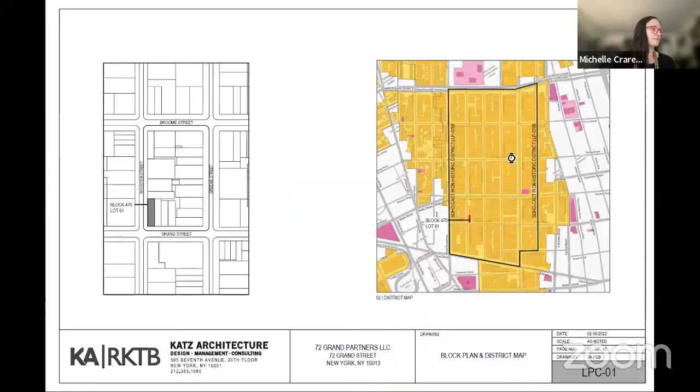Good morning, Commissioners. My name is David Katz, Principal of Katz Architecture, and I'm here to present our building at 72 Grand Street. One thing I want to note: we worked on this building with Carmi B of RKTB Architects. Unfortunately, Carmi could not make it today for medical reasons, so we will do our best without him.

As was noted, we last presented about 8 weeks ago, and prior to that back in 2020. Thank you for having us back again. We've refined the design with the assistance of the LPC staff, and I hope our revisions address all of the concerns that were brought up.

What you're looking at here, on the right-hand side, is the Soho Cast Iron Historic District boundary. On the left, you can see our building site. It's located at the northeast corner of Grand and Wooster Street.

On the left here is a 1940 tax photo of the building as it existed. This was originally a 5-story building designed by George DaCunha. A fire in the 1930s brought it down to 1 story. It's since been demolished and is no longer on the site. Just to the right of that is 74 Grand, which was actually rebuilt using the same cast iron elements that were there—a recreation of a building that was on the site previously.

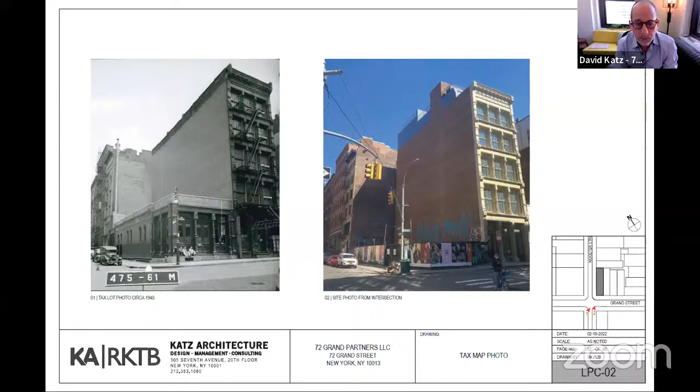This is an aerial view indicating the volume of the building we are proposing. It's a 5-story building with a basement and a setback penthouse that's not visible from the street—5 stories in keeping with the surrounding buildings in the area.

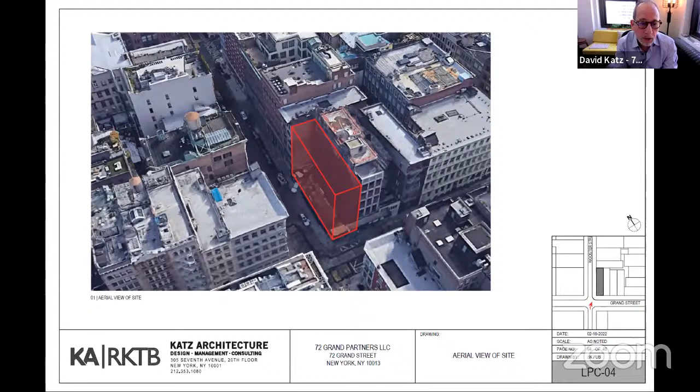Here's the view looking south on Wooster Street. Our building will be over on the left-hand side. You can see the vacant lot there.

This is a view looking west from down Grand Street. The beige building just adjacent to our site is 74 Grand, that I mentioned before.

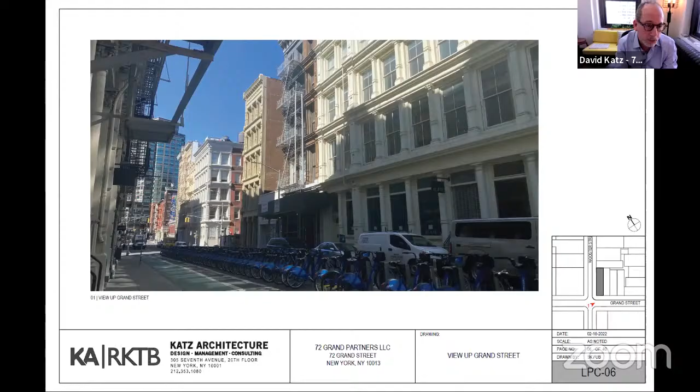And these are some of the neighbors on Wooster Street. As mentioned in our previous presentations, Wooster Street has a variety of building types. This building on the left, 40 Wooster Street, is immediately adjacent to our building. It has kind of a neo or sort of Romanesque vocabulary. A couple doors up, you have another building about 100 feet wide with rounded arches and smaller windows above. Again, in all cases, you see a pronounced cornice and a defined lower level. Just to the left of 42 Wooster, you see a corner building that's just a brick building with punched openings.

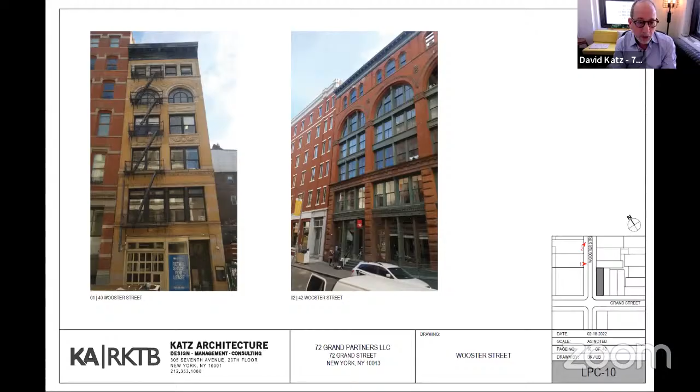Here, this is the building at the intersection of Grand and Wooster. This building was built, I believe, in 1879, and it was built in phases. Again, there's a lot of variation here. You have a sort of Art Nouveau building, a pronounced cornice above the first floor, and a similarly pronounced cornice with a lot of articulation, modillions and brackets.

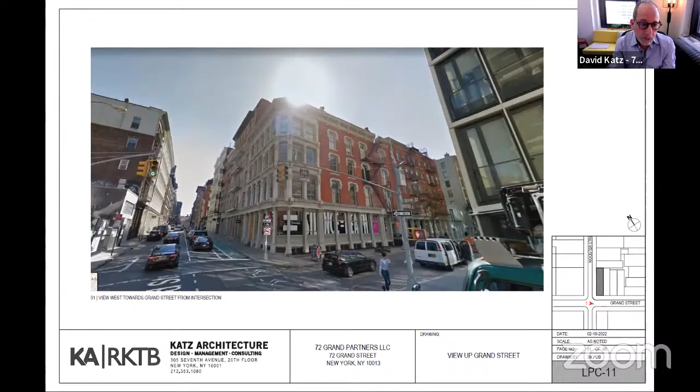As precedent, we looked at a number of buildings, but this one in particular for a few reasons, not the least of which is that it was designed by my colleague Carmi B of RKTB Architects. It's a commercial building located on Broadway and Howard, with a pronounced reinterpreted floating cornice. This is an aluminum composite material similar to what we are proposing.

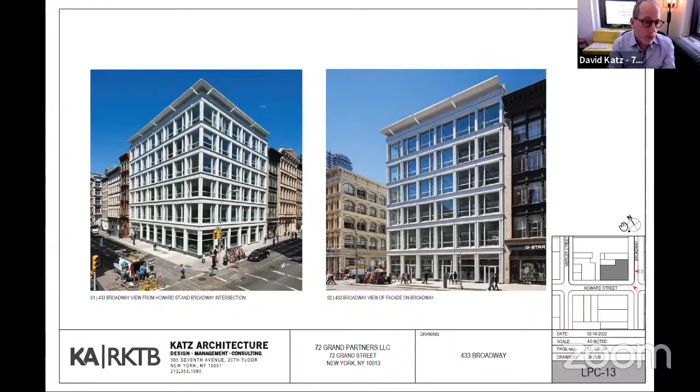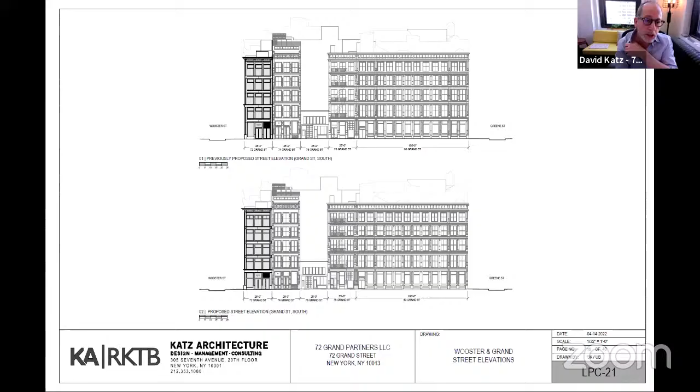This is a view of the Grand Street elevation. There wasn't an enormous amount of change on this. It was generally well accepted. Again, the water table was brought down to just above the first floor. We have introduced some articulation, which I'll get into on the next couple of slides.

The biggest of two other concerns was the change in fenestration at the third and fourth floor. And at the lower level, even though it's not visible here, the building comes down to a granite base. We were showing a black base that we have since changed in color to match more accurately with the aluminum composite material above.

The other thing that we've added here is articulation at all of the verticals. So we've lightened up the columns by bending them back and giving them some articulation. We did the same thing with the mullions between the windows to create that hierarchy.

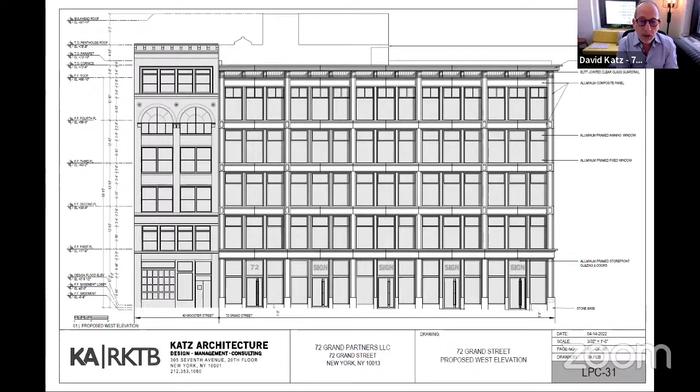The other thing that we did, I neglected to say before, is we've introduced this type of embellishment, or a sort of modern medallion, at the north and south bays of this structure. This does relate back to the original building on the site, which had a cast iron facade on the Grand Street side. It turned the corner, and then there was a brick section in the center, and on the end there was another cast iron section. So we're trying to relate back to that with the use of these medallions.

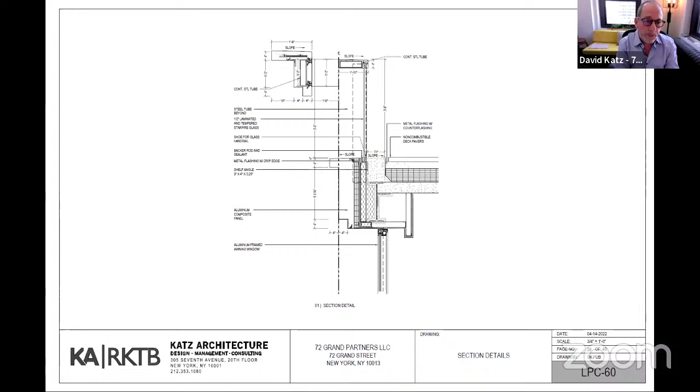This is just a detail drawing showing the way we would construct this. This is a steel frame building. We're wrapping it in an aluminum composite material. The larger elements here are the columns. The smaller ones are the mullions between the windows, which show the various setbacks that we've introduced since the last presentation.

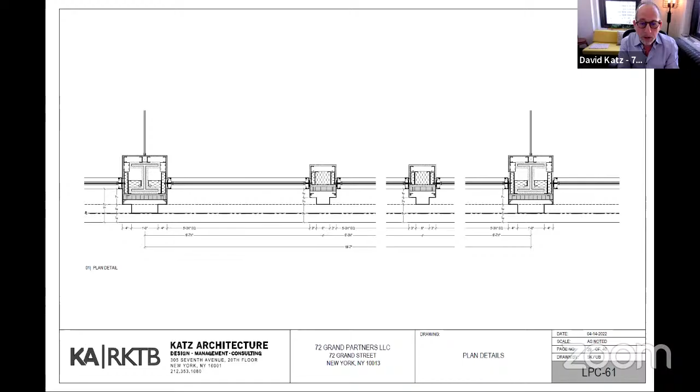And then this is a diagram just to show the level of detail that we've introduced to create this sort of crenellated, or this variation, I should say, in terms of the vertical elements to give them more shadow and detail and articulation.

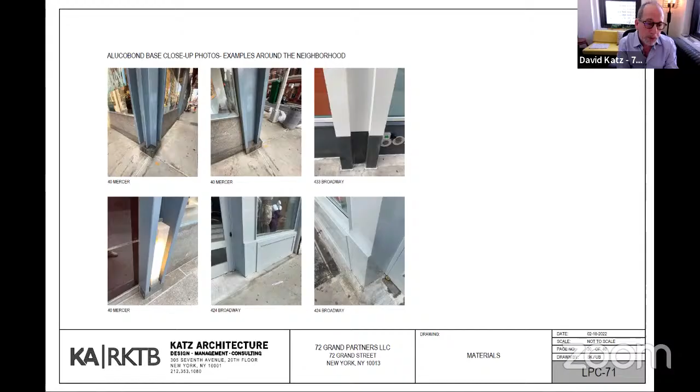In the district, there are a variety of examples of the same material. We looked at these buildings for the amount of detail they used and how they articulated the metal panel. At 40 Mercer, you can see how it turns the corner with a recess in that column. Something similar at 433 Broadway. And at 424 Broadway, you have a framed recess to give it a bit of articulation on the facade.

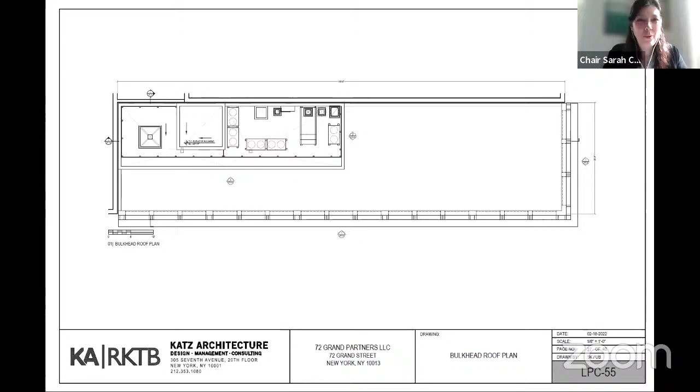Thank you. My question is simple: from the property line, which I gather is where your columns are placed right on the property line, what is the dimension back to the glass line?

How many inches? I have to check, I believe it's about 12 inches, if I'm not mistaken. Okay, thank you. Any other questions?

At the time, there were comments about the fenestration pattern and typology, whether it was looking toward the variety you see in masonry buildings or the regularity in cast iron buildings. I think the applicant has presented today that they're modeling their design on the cast iron typology, which has a fairly regular fenestration pattern they've tried to incorporate here, along with addressing questions about the material from last time as well.

The applicant has presented more information on the level of new details added and how it expresses itself elsewhere in the district. So we'll begin our discussion with that.

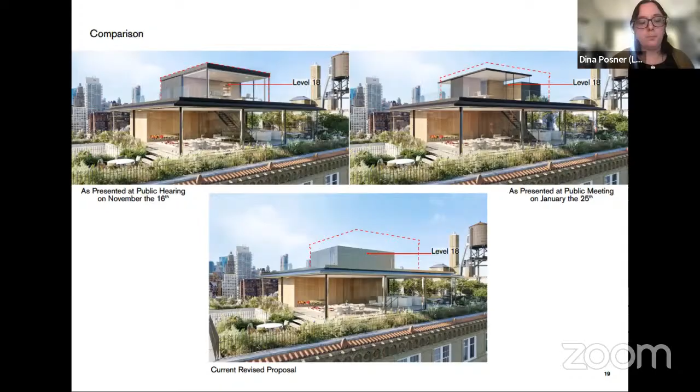Chair Sarah Carroll, commissioners, thank you for the opportunity to represent our proposal. In effect, we've moved from 2 stories of accommodation down to a single story, and the height overall is the same as it is now.

In other words, we've lowered it by 3 feet so that we line up with the elevator overruns. Like the present arrangement, it cannot be seen from the street.

From the longer views from the park, for example, it will now recede more by virtue of the color. So we've revised that from the quite contrasting black of the original proposal to something which is a mid-gray and relates much more to the sky views.

I think that's really the essence of the redesign. In summary, to go from 2 stories of accommodation to a single story and to reduce down to the present height of the overruns.

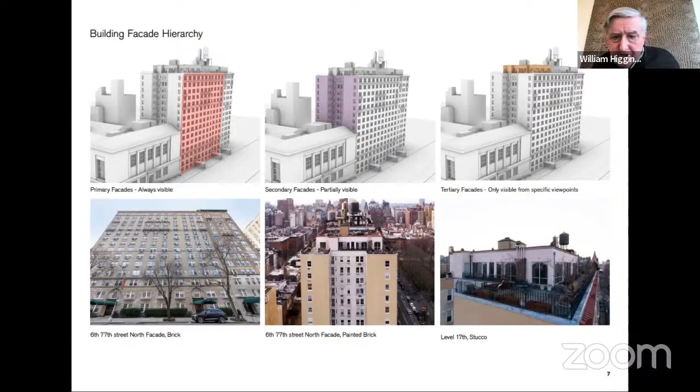The existing and proposed condition is very typical of what you see on the west side, where you get these juxtapositions of taller and shorter buildings and primary facades, and then lots of secondary side and rear elevations, and on top of those, the utilitarian volume. So the existing and proposed conditions certainly fit into that typical situation.

These are a number of typical examples of one-story-plus functional utilitarian enclosures above, additions that have been approved and found appropriate by the commission on the Upper West Side. One thing we think is important is that there are a number of languages the commission has found appropriate, from pretty historical in character to some more abstracted ones, particularly this one in the center, where there really is quite a modern language used. So the commissioners have found a variety of languages to be appropriate.

As Lord Foster has articulated in the past, the philosophy here is that in the evolution of historic buildings and historic places, a contemporary modernist language is a very appropriate way to express the ongoing growth and evolution. This, we think, fits precisely into that approach.

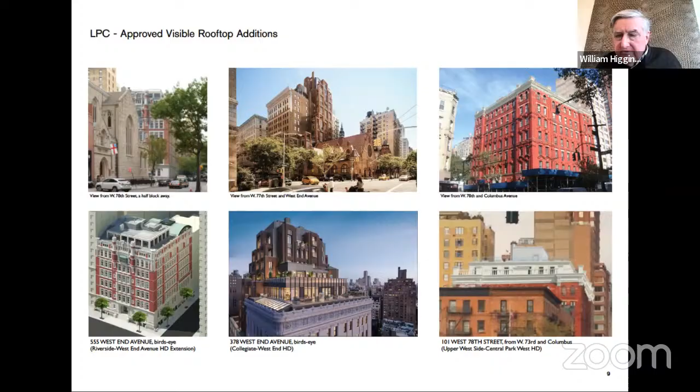The immediate context - I always think it's important to remember that directly across the street is the Museum of Natural History, and I don't know that we have any better example in New York City of how a historic place can evolve, including quite contemporary and carefully, thoughtfully designed new portions of construction. Although in a much smaller and more modest way, we feel that what we're proposing today fits into that.

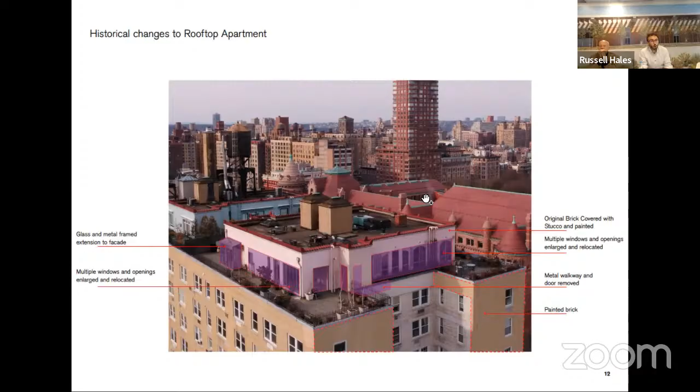Looking at the side elevation, it sits adjacent to another penthouse box, but you can see the elevator overruns which are existing. These do not open to level 18; they are the overruns from level 17 below. We think it's very important that proportions match for level 17, as we've explained before.

Looking from above, again a view you don't normally see, you have the elevator overruns at the top, but also a collection of MEP and chimneys added over its life and history. Our proposal is to consolidate those utilitarian elements and bring them together in an enclosure that matches the elevator overruns, also bringing up a new fire stair to this new roof level, which doesn't exist today and is currently accessed via ladders. This improves the life safety of the building.

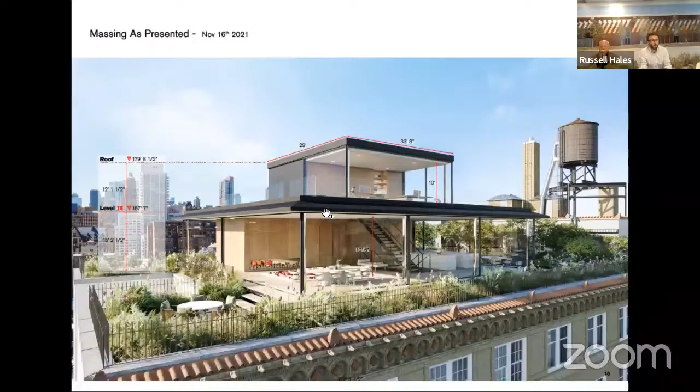So really this constitutes the majority of what the new enclosure will contain. As explained, this is where we were previously, with the glass enclosure upstairs at level 18. But level 17 is consistent through the designs - an open plan pavilion residential property surrounded by a garden. Coming back in January, we looked at modifying the heights and minimizing it, bringing it down around 19 inches and separating the MEP out to reduce its overall mass and visibility. But it was felt this still had a presence on the street.

So really looking at minimizing level 18, turning it into a utilitarian enclosure. This is 53% volumetrically smaller than our original proposal, and really just matching the elevator overruns. This starts to make it invisible from the streetscape on all sides - obviously visible from the park itself, but not from any of the streets that surround the project.

A summary here of the volumetric moves we've made throughout the life of the project, really thinking carefully about maintaining the clarity of the lower pavilion, which is really a replacement and not having an addition now.

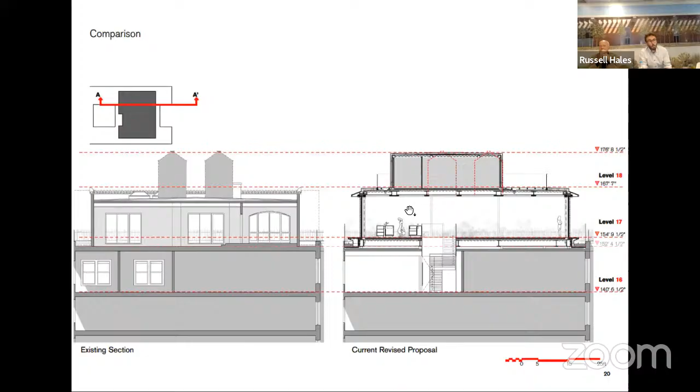Just seeing the cross section side by side, you can see how we're lining up with the elevator overruns shown in red here, and also running through the datums of the existing roof parapets and the tiles. Then the evolution showing where we were in November and how we've tried to bring that height down. But really, this is just the MEP enclosure on that upper roof.

From a footprint point of view, looking down on it, about 50% of it is MEP. We have the dark boxes here, which are the elevator overruns, which will be retained. To reduce visibility, we've ensured that we are tight on the eastern side up against those elevator overruns. Where we were historically, the pink dotted line here, we brought that back both on the north and south to ensure we don't have visibility from the streetscape below. You can also see the new stair tower coming up and some additional storage we're adding in.

So really just thinking now about the coloration, a zoom in of that level 18 and where we were with the glass enclosure at the top, which posed issues of materiality and illumination. As we looked at stepping it down, we then had the other conversation about coloration and really looking at the best way to make a receding volume up against that skyline.

As you saw from the photograph Bill shared earlier, we are looking back at this from the park. So we're trying to blend it into that rooftop utilitarian architecture collection that runs through on 77th Street - the water towers, the galvanized metalwork, the lead, the zinc - bringing that color through as a matte finish into our metalwork enclosure, but also the perimeter edging around our parapet, so that it lessens the contrast with the roofscape.

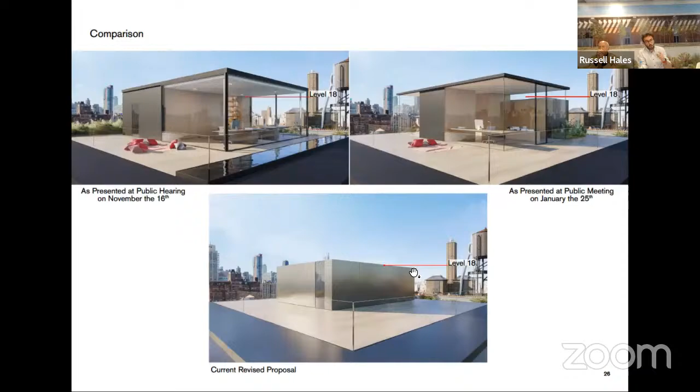And then seeing a summary of the moves that we've made from where we were to where we are today.

Obviously, we have a very simple material palette running through the project by the nature of it being the pavilion. The upper level here was the materials we chose, and we were looking at blackened stainless steel, but we're now proposing a more zinc colored, matte finished metalwork. And obviously glass is still the dominant material.

Learning from our experience on many projects, we're getting low iron glass so it doesn't have any tinting, having low reflectivity, the same type of glass we'd use in retail projects to really reduce glare and the way the light hits it. But again, thinking about warming up that ceiling color, we did look at darker colors, but that created more contrast against the sky. So a paler ceiling, but a warm pale ceiling, seemed to fit best.

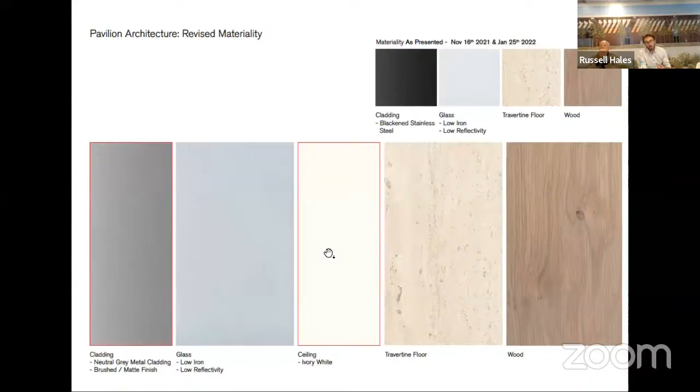This is just showing a cross section through the structure, and as we said before, we have a new steel cradle that sits across the project. This ensures we can spread the loads of the new pavilion evenly across the historical columns that run through the project, ensuring we have a new insulated, safe roof on top. And then the majority of materials are the glass, which have minimal frames.

And then we have a series of internal and external blinds providing privacy, light control, and actually help us with bird impacts. So this is a view looking back from the park, seeing the illumination.

In our earlier conversations, illumination was a key concern of the project. We're working with Suzan Tillotson on the lighting here, based in New York, removing any external lighting on the project. With our transparency, you can see right in. So it's really about not uplighting that ceiling and not washing our central core walls, to make it blend into the background and not illuminate the upper story. That really starts getting the silhouettes you see of the water towers beyond.

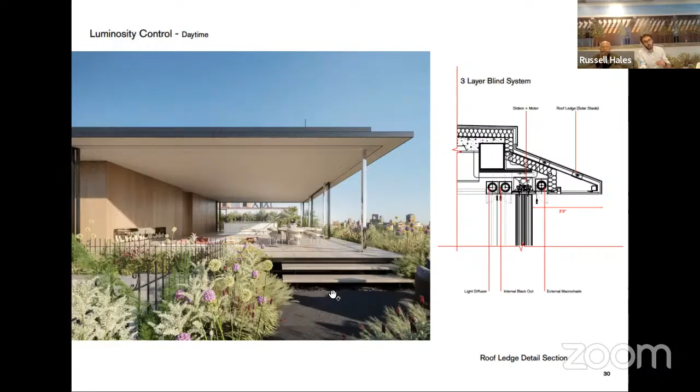And then a zoom in of how the fenestration works. Again, really looking at minimal detailing within here, the operable glass windows that can slide back. But then by night, when those are closed, how do we reduce the glare?

We have a series of internal blackout shades. From our experience, a darker color actually works very well behind glass and is less visible from the streetscape. But we also have an external macro shade, which will be deployed when solar gains are very high.

This actually works very well with bird impact as well, and we're working with Andrew Farnsworth from Cornell Lab of Ornithology to look at the best way of doing that. This is an intelligent system where we can deploy the external blinds at points of high migration for birds, really thinking about bird impacts and trying to mitigate that. That also comes into the landscaping, ensuring we have low landscaping that doesn't encourage roosting for birds.

So I think the key message for all of this is really the views. This is the current condition. As we said before, from 77th Street, immediately adjacent in front of the building, you cannot see the existing penthouse box as it stands. It's only when you move all the way across Central Park West that the existing pink stucco penthouse becomes visible.

Now, over the duration of the project, when we showed you before, level 18 was partially visible at the top. We then tried to reduce that with our scheme that came back. But really, where we are today, the fact we're matching those elevator overruns in height and setback means we no longer have visibility to level 18 from the streetscape around. So comparing top left here with the existing, and bottom right showing that only the level 17 datum runs through, and that level 18 now becomes invisible.

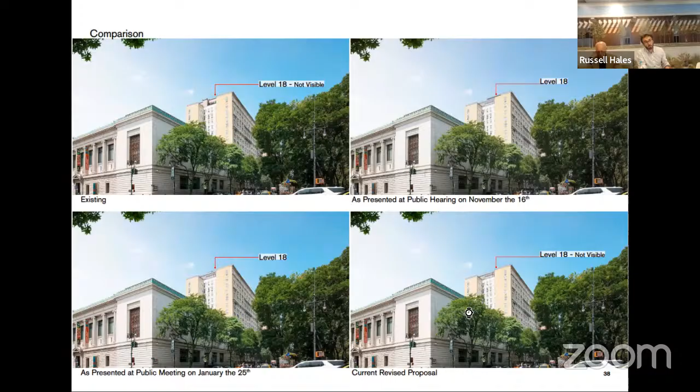That then continues around all the streetscapes. From 76th Street, you have the open lot view looking up. We know this lot will be infilled later in its life, but currently, when we had our January scheme, there was an element of visibility. Where we are today, there's no visibility on the right-hand side.

Again, moving down Central Park West, visibility was seen in our previous attempts, and again no visibility on the right-hand side here for level 18. That really is tracked through even in the views where we don't have leaves on the trees, probably the most visible view, looking through here in the winter conditions. And obviously we had a presence where we had the taller addition on level 18.

But as we move forward to where we are today, the enclosure at the top is not visible at all. Just showing the comparison from where we were in January to where we are today, I think we acknowledge there will be some visibility of the enclosure top. As you can see in this photograph, just above the pink stucco is the elevator overruns, which is just popping up, and that's visible from within the park itself.

Where we were back in November, which had a high level of visibility and elements of concern. But as we move to the January scheme, trying to reduce and balance it, still had visibility. So where we are today, you're just catching a glimpse of the utilitarian MEP enclosure that sits there, matching the same height as the existing elevator overruns to minimize its impact. Finally, just showing from top left to bottom right where we are, matching those kinds of enclosures at the top.

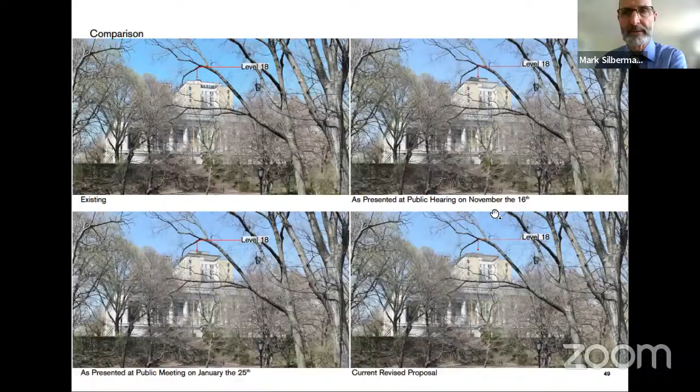With 8 in favor and 1 opposed, the motion passes. That's approved. Thank you, and that concludes our public meeting part of our agenda.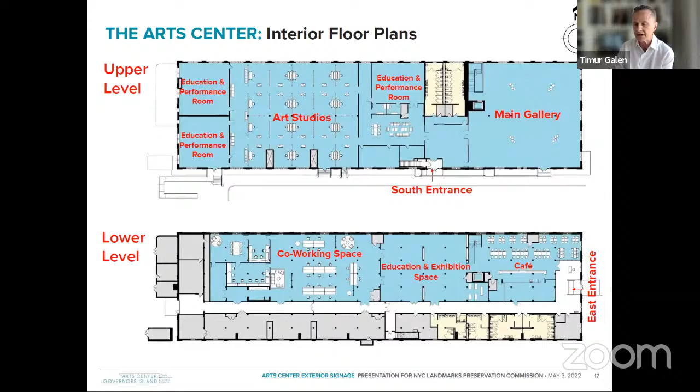The celebration of creative diversity presented live in public spaces throughout Lower Manhattan. In 3 short years, the Arts Center has become integral to how we serve, connect, and make space for artists in the community, a place for artists and their audiences to engage in the most challenging issues of our time. Working with the Trust, our exhibitions, performances, and other public programs are designed to explore island-wide initiatives, including climate change and environmental sustainability.

All of our programs for families and adults alike are free and open to everyone. We also give public access to artists and their creative process through workshops, open studios, and a range of other educational programs. Finally, our year-round residency program allows artists of all disciplines to research and incubate new work, engage with audiences on an experimental basis, and build the professional skills and networks essential to successful contemporary practice.

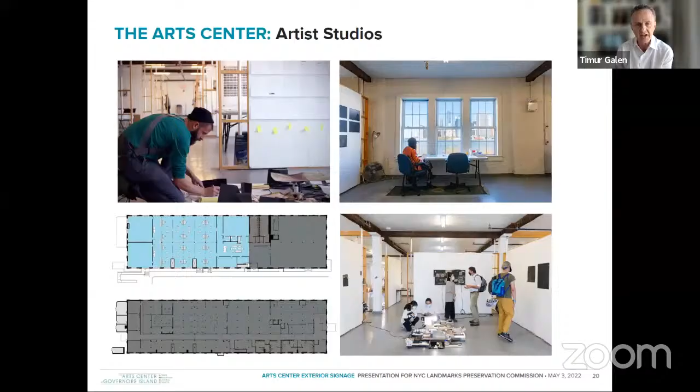The cafe, located at the northeast corner of the ground floor, is linked by an open architectural stair to the main gallery on the second floor above. Using the plan at the bottom of the slide, it's the area located on the upper right, immediately adjacent to the main entrance. The cafe, the adjacent exhibition and education spaces, and the main gallery above constitute the principal public-facing elements of the Arts Center.

With line of sight to the ferry landing, the cafe is designed to be open throughout the day and into the evening, a place for a coffee and brioche, casual lunch and evening meal, and most importantly, a place to experience the art of performance, be it musical, theatrical, the spoken word, dance, or other multidisciplinary works of art. Last summer, the cafe presented a series of concerts in partnership with Jazz at Lincoln Center. With ferry service now available year-round and increasingly into the evening, the opportunity to bring performance artists and their audiences together is truly boundless.

I can't tell you how delighted we at LMCC have been to work with Ann Harakawa and her 212 team, given how successful they have been in using public information design to shape the civic and commercial landscape of New York over the past 2 decades.

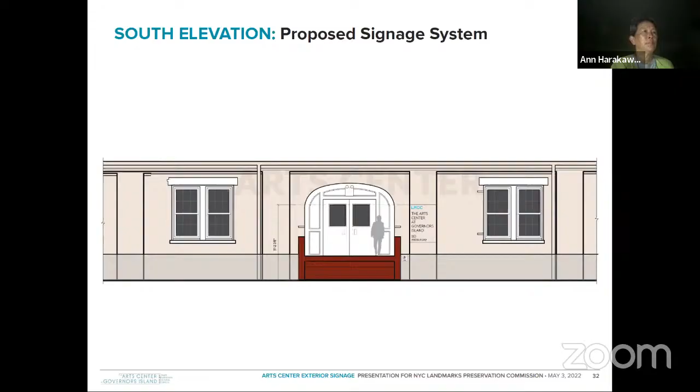So the tinted stucco letters are large scale letter forms that are stencil painted with a natural mineral silicate paint. The product we've specified is manufactured specifically for historic stucco facades with an appropriate range of subtle colors, and is frequently part of restorations that are guided by the U.S. Secretary of Interior's guidelines for historic restoration.

And then the building ID and address plaque is mounted onto a painted panel, colored to match the facade, with dimensional letters. The plaque will reduce the number of penetrations into the building facade for mounting, and the dimensional and mounting details are included in this drawing. You can see on the right, there's a section showing the number of penetrations.

And then ADA accessible code required signs are also needed at this entrance. Again, we've used a painted panel to reduce the number of penetrations.

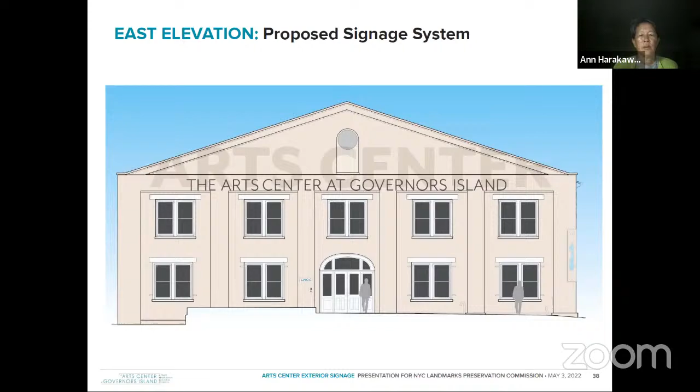So again, going through the details, this is the same stucco that was specified on the other side of the building here on this side.

These are the building ID channel letters, the scale of the letters, the thickness, and how they're meant to be mounted. They're actually mounted on a raceway, again, to minimize the penetration into the building surface.

Continuing on the door entrance signs, again, here we use the painted panels with pin mounted letter forms to reduce the penetrations. So you can see we've designed a kind of system for consistency at the entrances, as well as simplifying the methods.

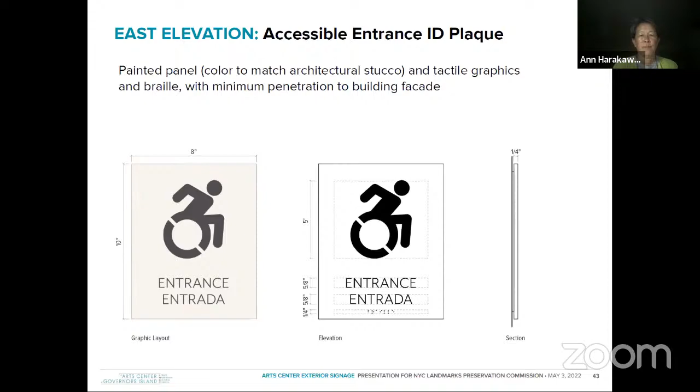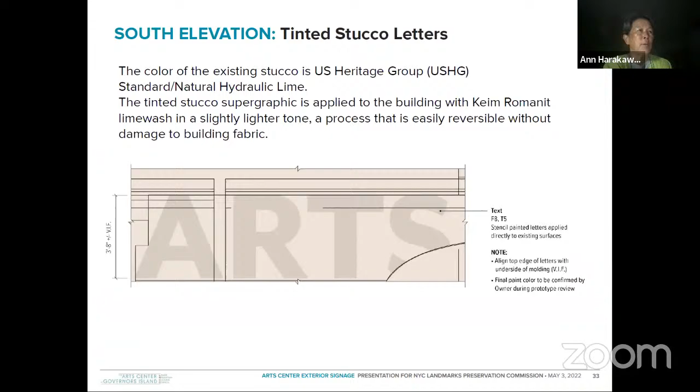Are you talking about the sign panels at the right side of the door? Yeah, why not put one on the left-hand side, just to keep the symmetry? Yeah, I think that in this particular case, we didn't necessarily feel that we needed both of those signs. We felt that we only needed one.

And we were thinking about the surface of the building as well. That's true, but in terms of the architecture, you just need one functionally. But perhaps two would work with symmetry, but perhaps not. Just a question, just a thought. Thank you. Okay, other questions?

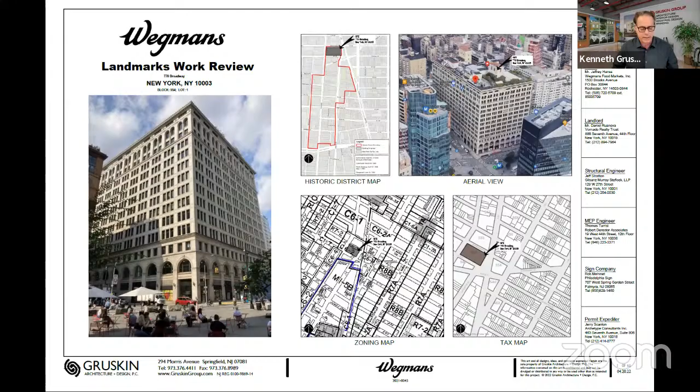Let me start with the ground floor, because it sets the story for Wegmans. They're taking about 92,000 square feet of space on grade level as well as the lower level. They're taking approximately 10% more space than Kmart had there previously, and anticipating serving a market area about a mile and a half in the Manhattan area.

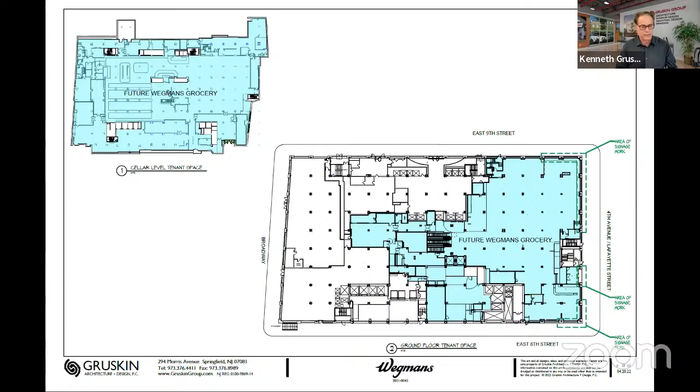When we get to the infrastructure of the cooling tower and generator, size is certainly part of it. Being 92,000 square feet will make them, if not the largest, among the largest supermarket grocery stores in the city. The closest one is Whole Foods up at Bowery and Houston, which is about 70,000 square feet.

So we're going to start with talking about the signage. But before I get there, I want to say that for the wall signs, we've worked with staff and appreciate all their input. We've worked to meet the staff level review criteria. The only reason it's here today is because of their larger size, because of the larger building and the larger tenant space that Wegmans is taking.

Wegmans has tried to be sensitive and acknowledge the historical nature of this building. In fact, they've altered their standard sign package. If you've been to a Wegmans elsewhere, it's usually a red channel letter. Here, they're going to a halo-lit sign, which we know Landmarks prefers. The letters are in a gold anodized finish, which is more historic and fitting with the building. The green matches the previously approved colors of the window mullion systems. It's all meant to fit into this environment. These areas show where the signage is being proposed.

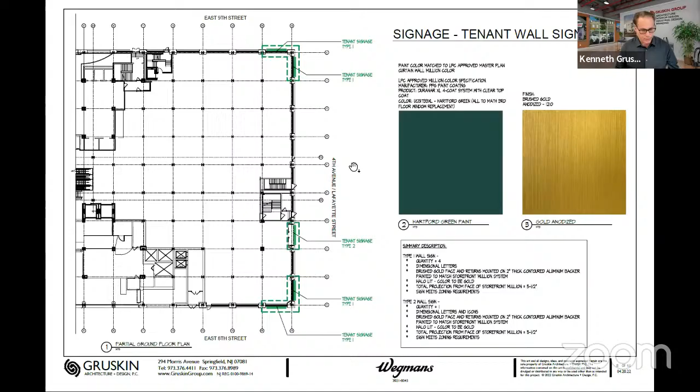Looking at these elevations, there are two types of signs on the building. There's the type 1, which are on the corners, and the type 2, which they call the fork, plate, and goblet, which is over the entrance.

In terms of lighting, the signs are typically lit 1 hour before and after store hours, and the store hours are anticipated to be approximately 7am to 11pm. All the signage we're showing you today complies with all zoning related requirements, well under that, and is subject to LPC approval.

This is a type 1 sign, designed to scale and fit into this clerestory area. The green is the backer, using a halo light, with brushed gold letters. This next detail shows the sectional detail of how it applies. It's supported by the mullions, and all the mounting attachments and wires are concealed, so it's a very clean installation designed to scale and fit into that space.

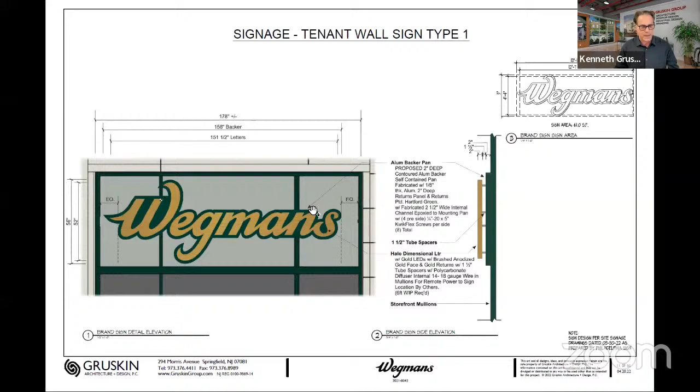This is the type 2 sign, the fork, plate, and goblet. Same as the other in terms of lighting and finishes. This is sized to fit into this center zone and mark the entranceway.

In this next sign detail, you'll see it has all hidden supports and attachments and wiring, except there's one attachment bar that comes across in the same green finish. That needed to be there because the wind loads wouldn't allow it to be supported just on the mullion at the bottom.

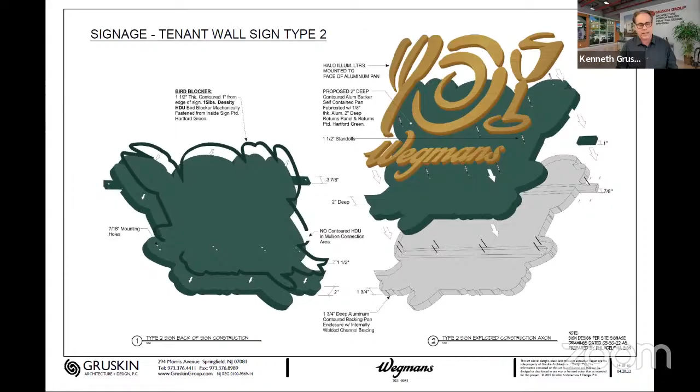This is a view of the backside, shown to demonstrate that the Wegmans team has put thought into maintaining the integrity of the sign and also preventing bugs, bees, and birds from nesting in the back or between the back of it and the glass, with a bird blocker and such, trying to keep the sign clean and keep debris off the building.

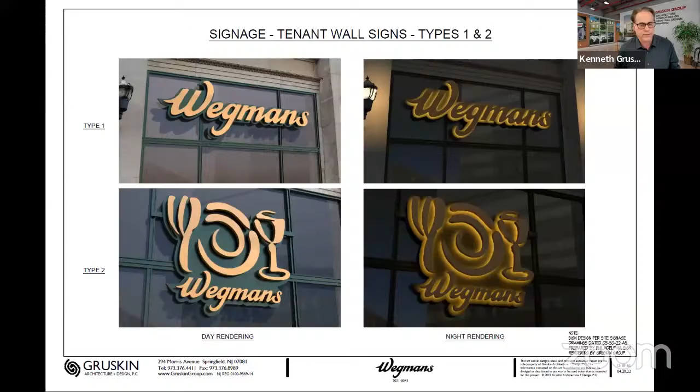This is a rendering of the type 1 and type 2 signs in day and nighttime. The illumination is going to be a soft gold glow that will match the articulation of this lettering that we see in the day.

So now we're going to talk about the promotional signage being proposed in the windows. Just to point out, those are really just in this corner. If you look at the plan, this is where checkout is—you have self-checkout registers and some manned checkout registers along the windows. The signage we're proposing has numerous functions, including visual security, which we'll talk more about as we move along.

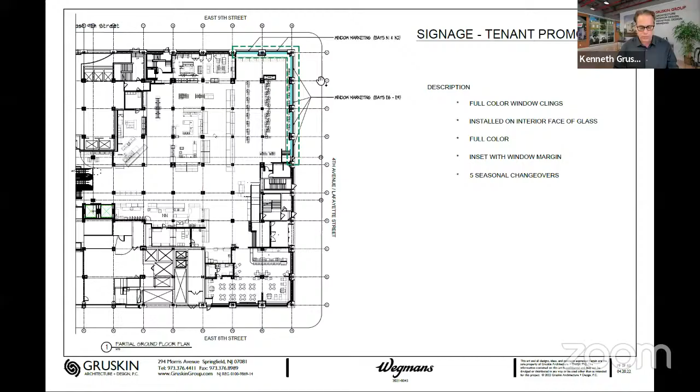So this is an elevation that shows where these promotional graphics are going. Again, just from a zoning perspective, not LPC, what's being proposed for Wegmans is less than, about 45% of what technically might be allowed, even when you include this.

Also, all the window graphics have a 6-inch space around them. So visually, as you walk by, you can see activity inside, yet they also provide some visual security to people on the inside at the registers and whatnot. Now, a key point about these graphics: they are perforated and they cling to the inside of the window. So you see the plane of glass, and from the outside you wouldn't necessarily know if it's not a solid opaque panel.

They are full color, and unlike most graphics you'd see at supermarkets that change weekly with specials like buy a loaf of bread for X, these are more storytelling and change 5 times a year. You can see the schedule. So they're really about communicating values, storytelling, and a little about how they do business.

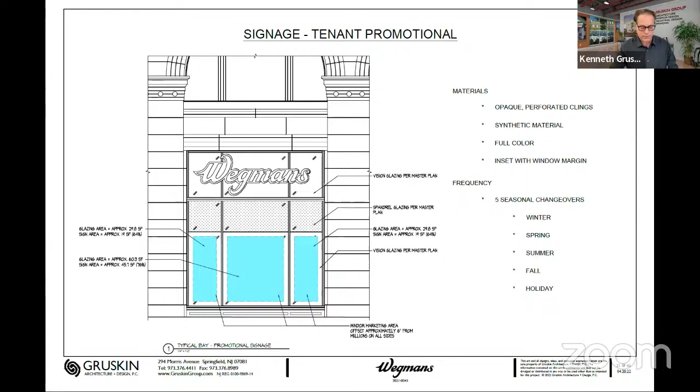Previously Kmart came before you a while back when they made changes to their signage, and what was approved was that only 3 windows were open—everything else was either opaque or completely covered with their displays and graphics. Certainly what Wegmans is proposing is significantly less than this, in that we're opening a lot more windows.

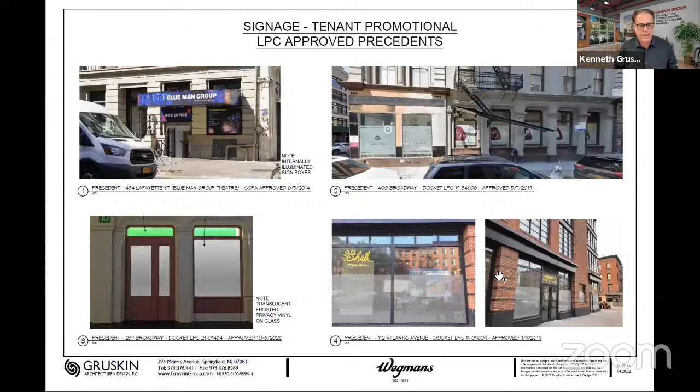So with that said, I'm going to move on to the infrastructure up on the roof that's being added, the standby generator and the cooling tower. The big thing I want to get across from the start is there was almost no real estate left up here to work with.

The team looked at every possible option to make sure that whatever could be seen from street level would be minimized. We can tell you that the standby generator in this corner—the only other corner available was where the cooling tower is. It wouldn't fit here, so even if we wanted to put it there for some reason, it wouldn't have fit.

When it came to the cooling tower itself, which we'll talk about in a minute, we looked very carefully at whether it could be rotated, could it be smaller, could it be pushed. It's really optimized where it is now, and we'll go through that.

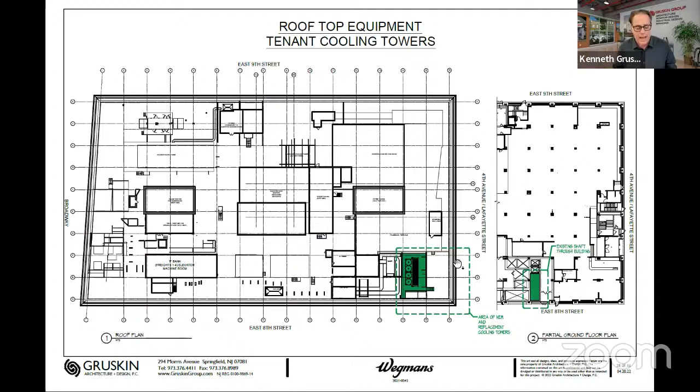Also, could it be rotated? The only way onto the roof, you have to actually go through the Facebook terrace, and there's a little series of steps here. If it was rotated, it wouldn't have been possible to get to the roof. And the other part is, we believe that as you come down Lafayette from Prince, it would have been much more visible, which you'll see when we get to the renderings. Certainly it would have been on top of the Lafayette along Astor Place.

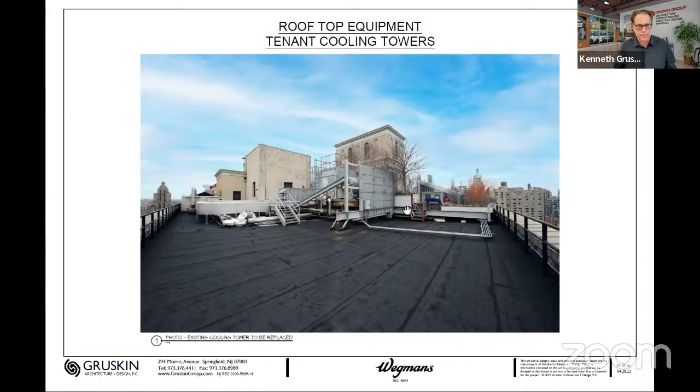This is a photo of it up here. You can see a screen wall that is for acoustic and some visual privacy for the Facebook crew up here. This is the access ladder to the roof.

Additionally, we even explored whether the dunnage could be reduced, lowered to the roof to reduce height even a little bit. It's really optimized because you have to maintain clearance for roof maintenance, plus you have to have enough size to the dunnage so that it reduces vibration traveling into the building and also maintains safe connections and construction integrity over time.

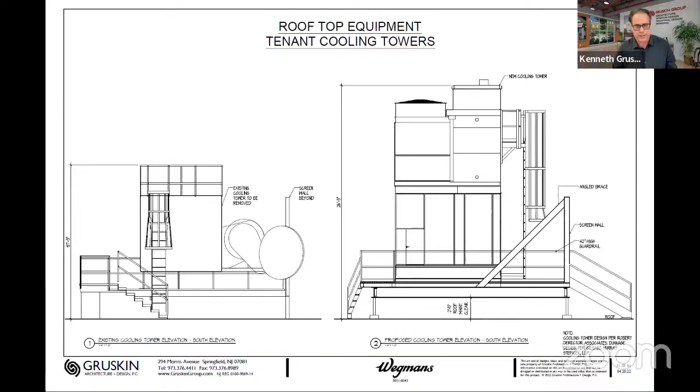Mr. Gruskin, we are significantly behind schedule. So if you wouldn't mind focusing on the highlights with the visibility, we can come back to any technical things with questions later. Okay, well, I think I went too far, hold on.

All right, so I'll just jump to the renderings and the photos. Basically, this is the mock-up on the roof here, pretty self-explanatory. When you get to Astor Place, that corner by Cooper Union, basically it's still invisible, so you don't even see the cooling tower in this location.

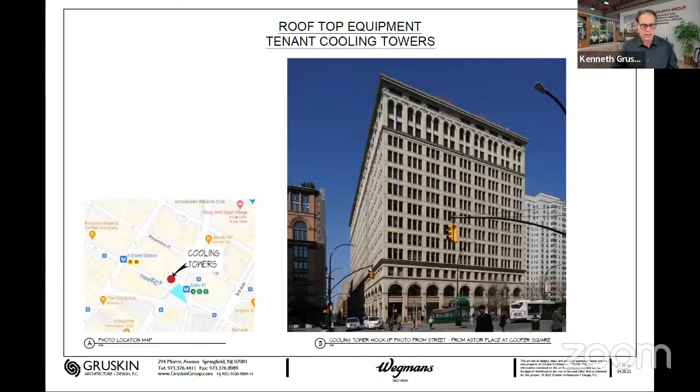As we start moving towards Astor and 3rd, it starts to become visible and you can see the rendering of what it would look like. It's a dull gray to kind of blend in with everything that's up there.

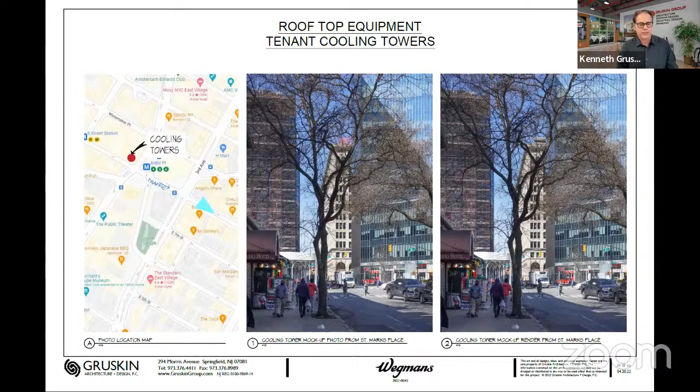As we move towards St. Mark's Place, basically it's the south side where it's only going to be visible to pedestrians. The north side is not visible. Trees really start to block it out, and the traffic is heading the opposite direction, so it's not even really visible to them as well.

Now as we move down Lafayette towards Prince, at this distance we're basically at Lafayette and Astor Place, and it's just barely visible.

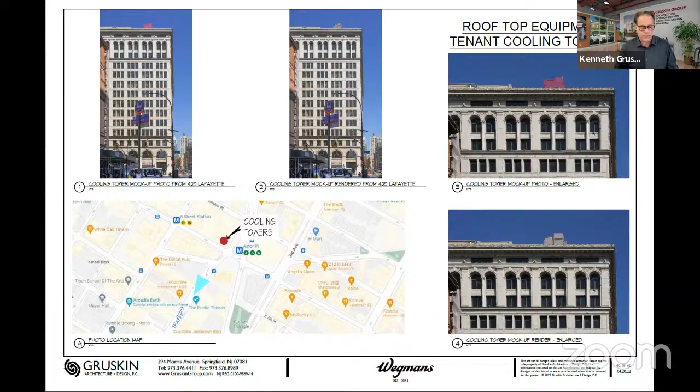As we start moving again towards Prince, at 425 Lafayette, you start to see a little bit of the cooling tower.

Once we get down to Lafayette and Bleecker, it completely disappears into all the rooftop equipment, even the trees on the Facebook terrace. Also, if it had been rotated, I think it would become much more apparent on this approach.

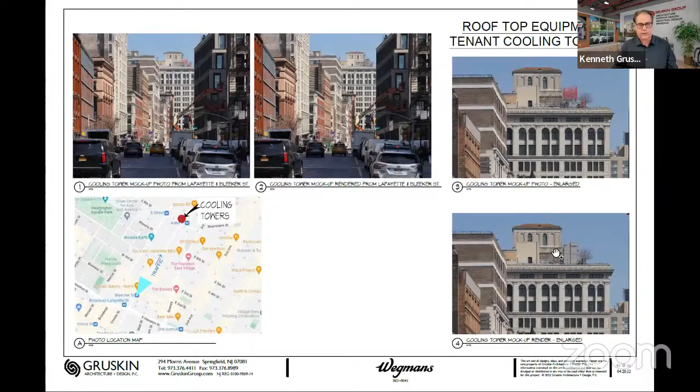Finally, at Lafayette and Bleecker, it blends into the background, pretty much fitting. You can see that 52-foot penthouse and the 27.7 penthouse to the left, so it kind of fits in right there.

So real quick about the generator. Again, it's only designed to do 80% capacity, and Wegmans' idea is first to open, last to close, meaning they should be able to operate and support the community at times of emergency or power outages.

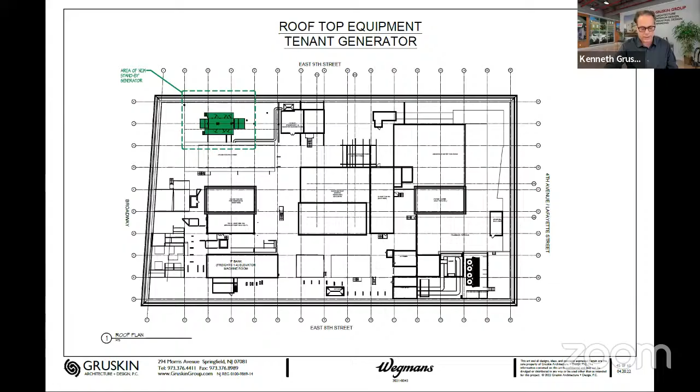This is the rooftop equipment in that corner, the cooling tower. The standby generator has been located where it is to provide the proper air clearance to the existing airflow required for the cooling tower. It also has a dull metallic polyester finish to blend into that cooling tower because it basically collapses in view against it. Again, you can see the cooling tower beyond it and the generator.

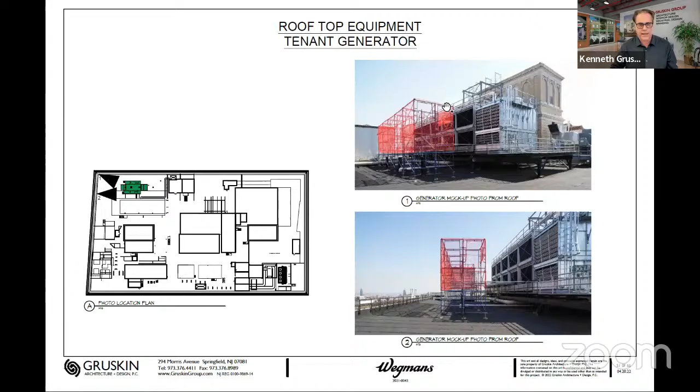So these were the sight lines, but the photos will tell the story. Let's move ahead. This is the mock-up up on the roof, and you can see how it kind of collapses against the existing cooling tower. Now, as we start moving along 9th Street...

At 35 East 9th Street, you're 608 feet away from the building before you ever start to get a glimpse of it. Traffic is also flowing away from you, so it's not even really noticeable to traffic.

When we move further down the street to 30 East 9th Street, you start to see it, but you can see the other large 52-foot penthouse and the cooling tower and other appendages up there. It fits into that scale.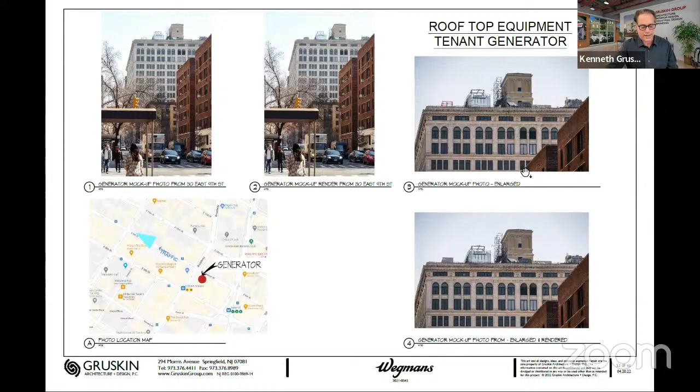Finally, when we get to University and 9th, beyond this point, since traffic's going the other way, it's really just about pedestrians on the sidewalk. At this point, it's well visible, but it certainly blends into that rooftop.

Just to be thorough, we did look around the other access points, and when you look at East 9th and 3rd Avenue, it's not visible at all.

We also took a quick look at 10th and Broadway. It's not visible from there either.

Lastly, there is a slight filtered view at 13th and East 8th Street. It's up here in this little corner, but for all practical purposes, it's invisible.

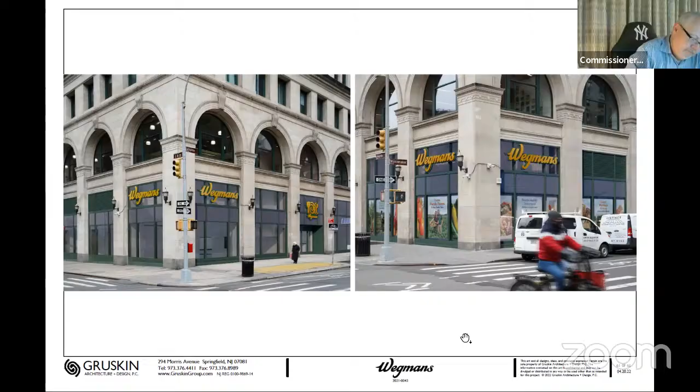Chair Carroll, Aye. Commissioner Bland, Aye. Commissioner Shamir Barron, Aye. Commissioner Chapin, Aye. Commissioner Chen, Aye. Commissioner Devonshire, Aye. Commissioner Goldblum, Aye. Commissioner Gustafson, Nay. Commissioner Jefferson, Aye. Commissioner Lufty, Aye. Commissioner Holford Smith, Aye. With 10 in favor and 1 opposed, the motion passes.

So that's approved with the condition that you work with the staff on those 6 window films.

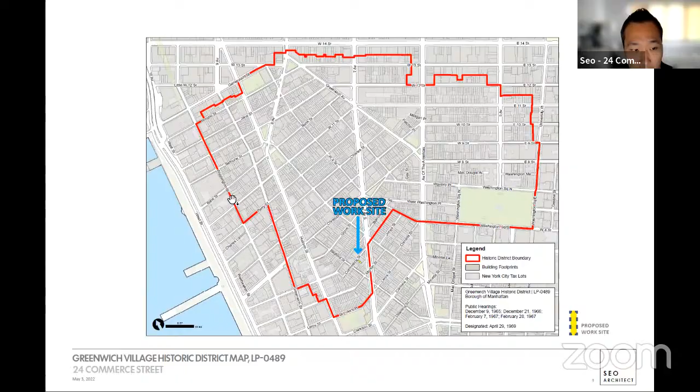This property is located in a triangular shaped block defined by Commerce Street on the north, 7th Avenue South on the east, and Bedford Street on the west, and the site is on Commerce Street facing north. The house is located in the south of Greenwich Village Historic District and near the border of 7th Avenue South. This is the block plan. As mentioned, the house is one of 3 federal style row houses constructed in 1821, and these 3 row houses are surrounded by taller buildings.

On the east side, we have a 4-story residential building, 20 Commerce, and also at the west corner of the block, we have a 6-story mixed-use building, 72 Bedford Street. And south of that, we have 70 Bedford Street, also a 4-story residential building. It's not indicated here, but it has a 1-story extension infilling the gap between 70 and 72 Bedford Street. So the rear yard of these 3 row houses is not visible from Bedford Street. And south of our property, we have a 4-story mixed-use building, 54 7th Avenue South.

This tax photo shows the history of the building. The 1940s photo has the fire escape on the 2nd story and then the attic level, but it disappeared sometime after the 1980s. The building front facade has been painted white, and it's peeled off over time.

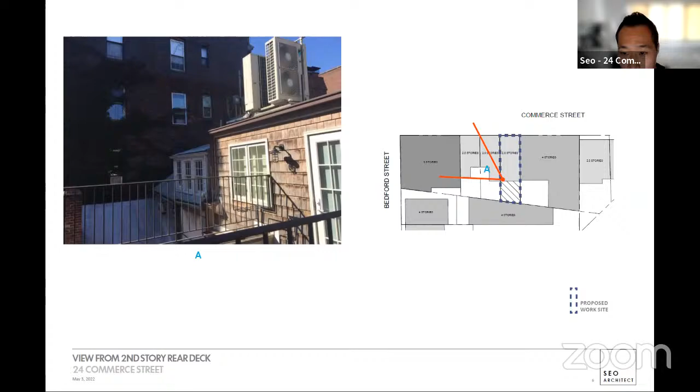This is a view from the 2nd story rear deck. This shows 20 Commerce, from the view from the rear yard ground level. The next photo shows 54 7th Avenue South, and this photo shows 70 Bedford Street and 72 Bedford Street, and also 28 and 26 Commerce.

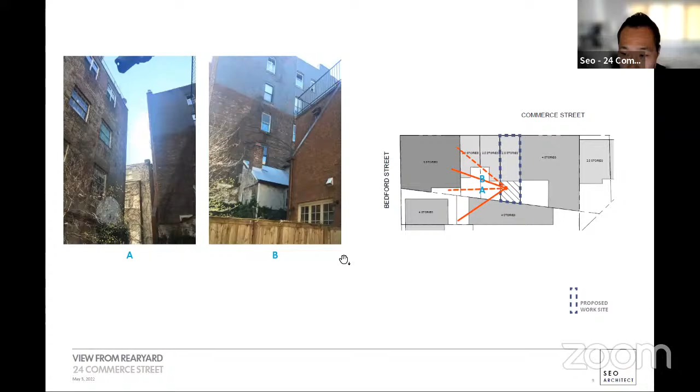So previously we had an approved at staff level for the rear yard extension on first and second floor level, and this application is only for the roof modification for rear shed dormer extension on the attic level. The scope of work is only demolishing 60% of the rear roof, and we are keeping the 40% as it is.

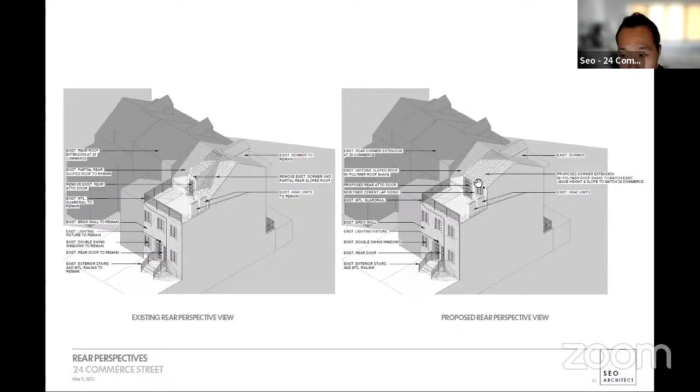This is showing the perspective of existing on the left and proposed on the right. We have previously approved the HVAC unit on the rear terrace level, and demolishing the shed dormer for the terrace door and the extension to the east side of the roof. This is showing the existing condition of the roof, and this is the proposed shed extension.

Material-wise, we're using the polymer shingle, which was previously approved at staff level, to match with the cedar shingle, which has a 5-inch exposure, and we're matching to that. We also have siding, a James Hardie board in ivory color, on the side of the dormer and also the rear wall of the attic.

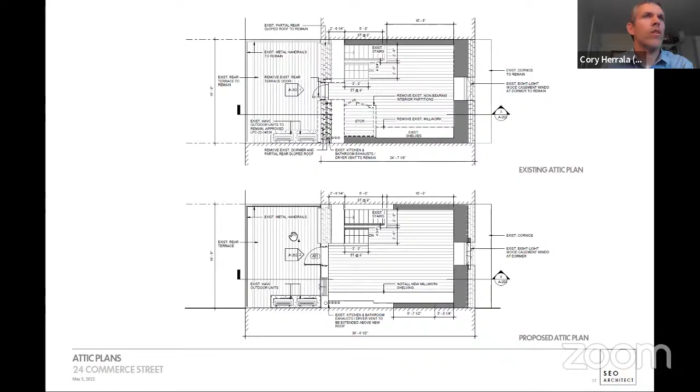This is another view of the existing roof, and then this is the proposed. Mr. Seo, I think we could stop there on that rendering, as it gives us a good picture of the application, and there is a samples board towards the end if we need to refer back to that.

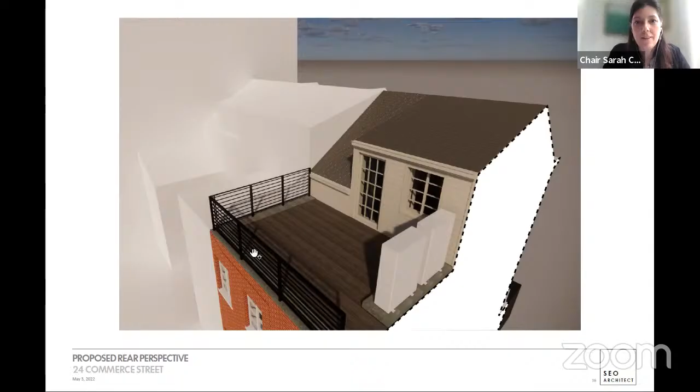Okay, thank you. All right, commissioners, do we have any questions? I don't see any questions at this time, so let's move to public testimony.

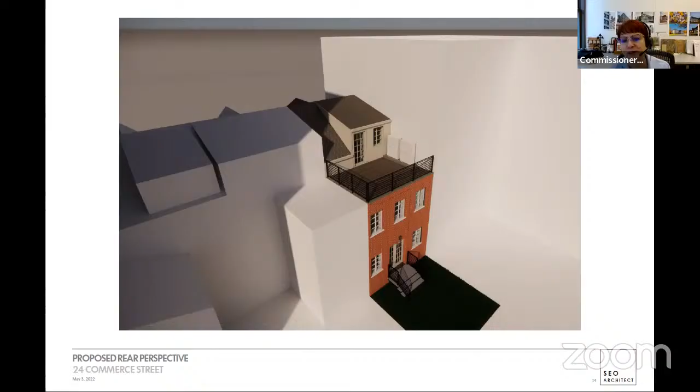Commissioner Chapin: I agree with what previous commissioners have been saying. It's not visible, it's modest, and it's part of the roof line. I think it's similar to other things we have previously approved. So I can approve it as presented.

Commissioner Devonshire: I think it's fine, quite appropriate. Commissioner Chen: I agree. Commissioner Bland: Yes, modest, appropriate. Commissioner Lutfy: Very appropriate. Commissioner Jefferson: Appropriate. Okay, I think we all agree this is appropriate. It's modest, not visible from any public way, retains a portion of the sloped roof, and is in the context of large apartment buildings and 2 other buildings in the row that have also had altered dormers.

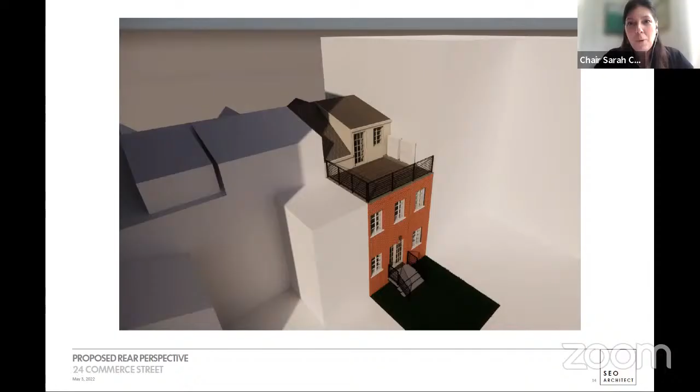So Commissioner Gustafson, would you go ahead and make the motion? Boy, hungry commissioners are efficient commissioners, aren't they? In the matter of LPC 220705A, 24 Commerce Street, Greenwich Village Historic District, the application is to construct a dormer. I note that the building's style, scale, materials, and details are among the features that contribute to the special architectural and historic character of the Greenwich Village Historic District.

I recommend approval, finding that the introduction of shed dormers has precedence on row houses of this type and period, that the proposed enlargement of the dormer will not be visible from any public thoroughfare, that the construction of a dormer on the east side of the roof to the lot line wall has precedent at the adjacent row house, reflecting the location of the existing original stairway, that the composite shingles and Hardie board siding of the enlarged shed dormer will recall the historic cedar shake shingle and wooden clapboard materials of adjacent dormers in this row, that the proposed dormer will be pulled away from the opposite party wall, retaining a portion of the slope of the federal style roof, and that the work will not detract from the special architectural or historic character of the building or the Greenwich Village Historic District.